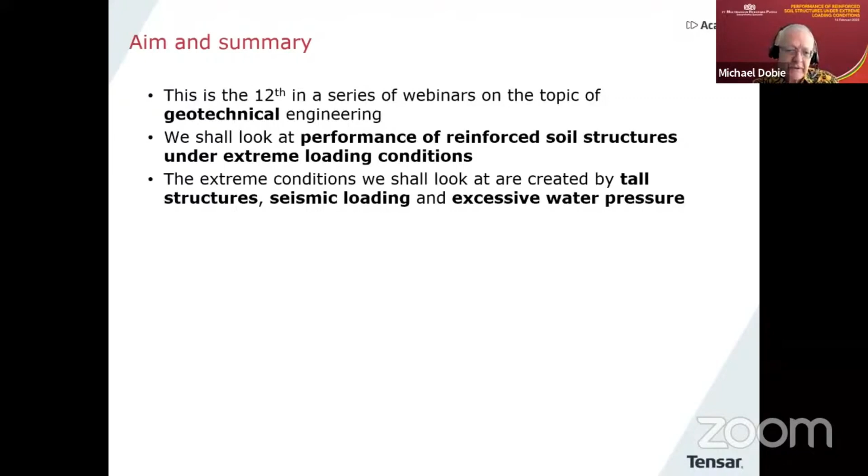In fact, the extreme conditions that I want to look at principally involve tall structures, which obviously create high stresses. Then we have seismic loading, which can be very extreme, and also, of course, water pressure, especially when the water pressures are quite high.

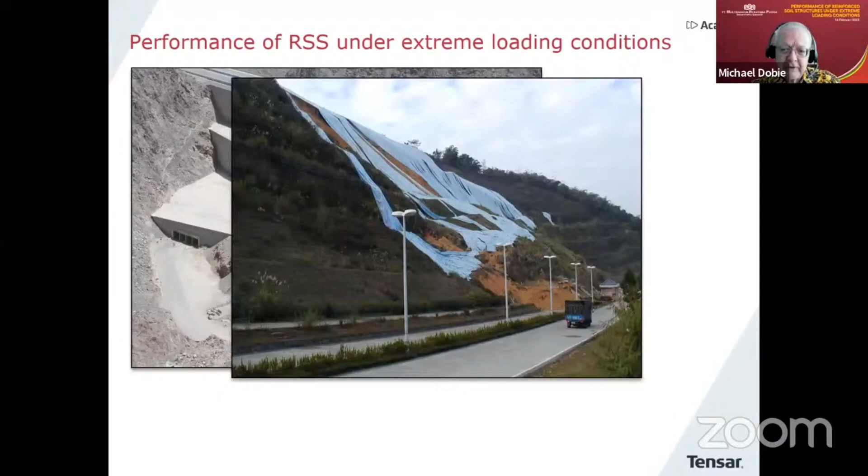So some images, tall structures. I said we'd talk about the effects of tall structures because they create such high stresses. The effect of earthquakes, which unfortunately can cause failures like this, and the effect of extreme water pressure and water conditions. That's the aim today.

And what I would like to do is to look, in fact, at a variety of situations. We'll look at 3 tall structures. In 2 cases, there'll be earthquake loading, and in 3 cases, there'll be water pressure involved. And of course, there will be some combinations of the 2.

And really, my main aim in doing this today is to look at this question: could routine design and stability analysis have predicted what was later observed? This is very important, really, because we rely on these techniques in our designs, especially in routine design, but we would like to have some idea if it would predict some of these sorts of conditions and events which took place.

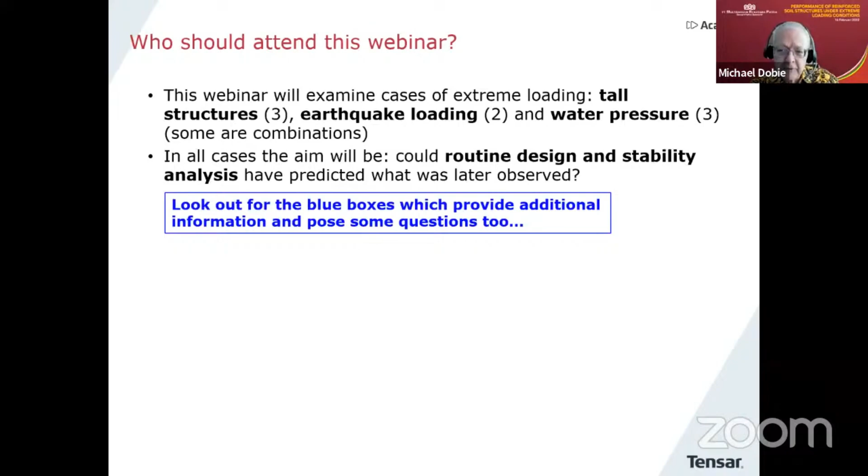As usual, I have these little blue boxes which will come up from time to time with some special or additional information. This is aimed at civil engineers who are involved in reinforced soil structures, and hopefully might be of interest also to more experienced geotechnical engineers and geosynthetics specialists.

So I'm going to look at 5 cases, cases 1, 2, 3, 4, and 5. And this first one is to do with water pressure.

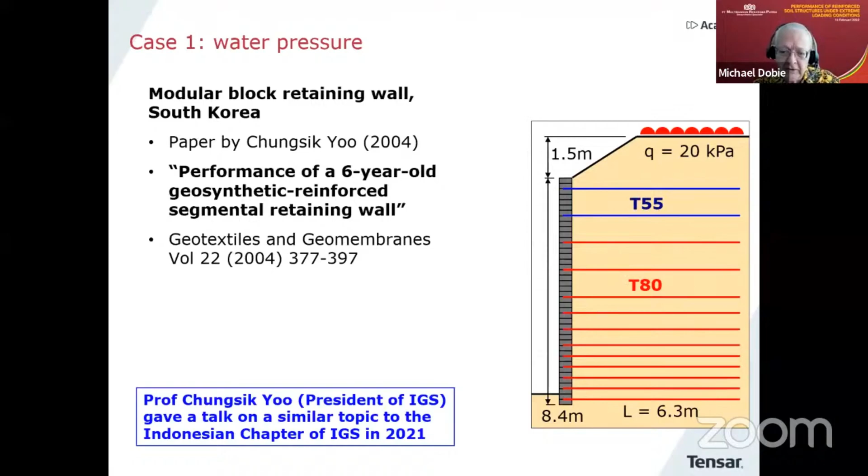It was a wall built some time ago in Korea, and there is a published paper about it by Professor Chungsik Yoo, and you can see the details there of the publication. Of course, Professor Yoo is also the president of IGS, and he talked to us last year in an Indonesian chapter event of IGS on a similar topic, but not this particular wall.

So a few details. This was a chemical plant in Korea, a modular block wall. You can see the range of the heights there. And what was rather important, it was supporting both an access road and utilities. It was built in 1994-95.

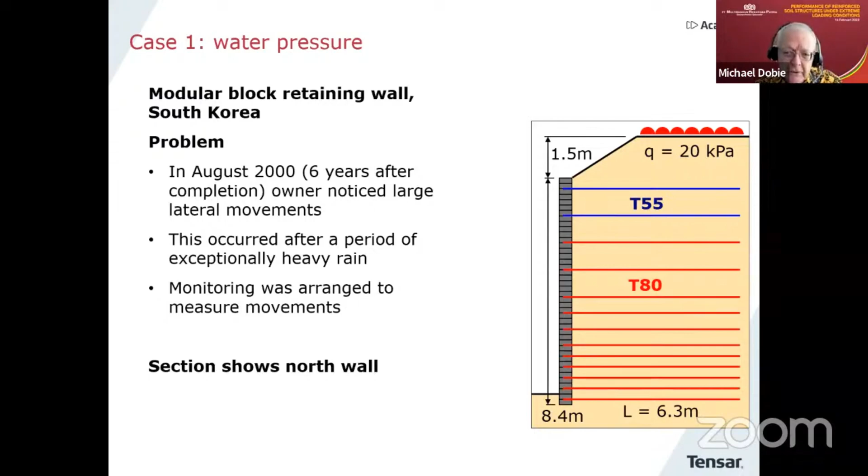And then what about the problem? Well, in August 2000, which was 6 years after completion, the owner noticed that there were lateral movements going on in the wall. And I think, as usual, this was occurring after a period of very heavy rainfall. So the client was very sensible and organized some monitoring to look at the deformations which were taking place.

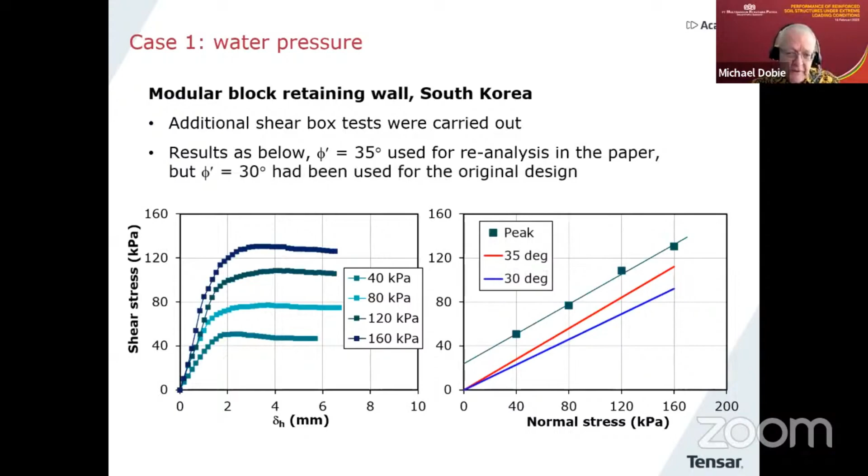So what I'm going to do then is to carry out some investigations using a design method based on 2-part wedge. And it's also a method set up following the principles of AASHTO LRFD. And in the results we see, the results are given in terms of what's called CDR, or capacity demand ratio. And of course, we want to see values that are 1 or greater.

But you'll see in the internal calculations, if particular wedges have a CDR less than that, a post-construction strain calculation to look at serviceability, also based on the same 2-part wedge approach. So here's an image from a computer program which carries out these calculations for you.

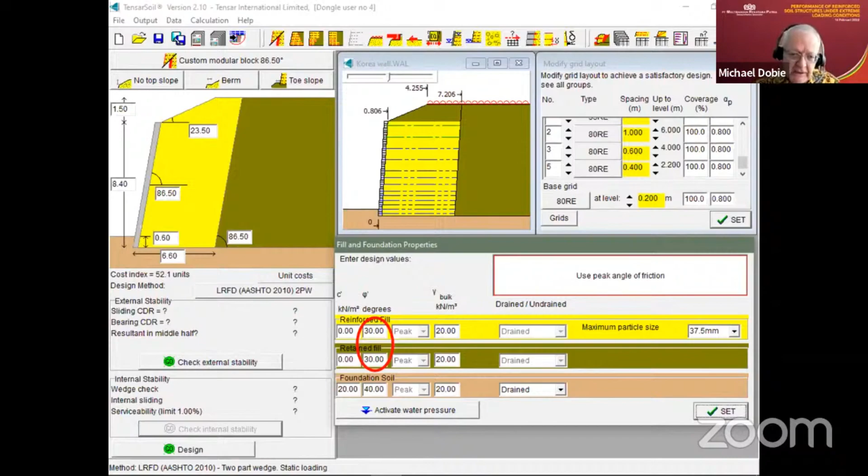I think it's fairly clear what's going on there. You have the section in the middle at the top. And in this particular input, we're inputting the properties of the fills, and you can see there a phi of 30 degrees. So I put phi of 30 there in large characters, so that reminds us what's going on.

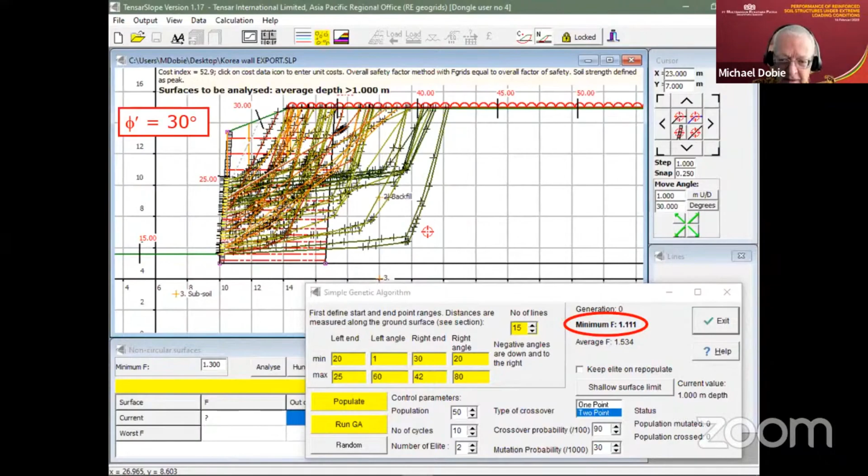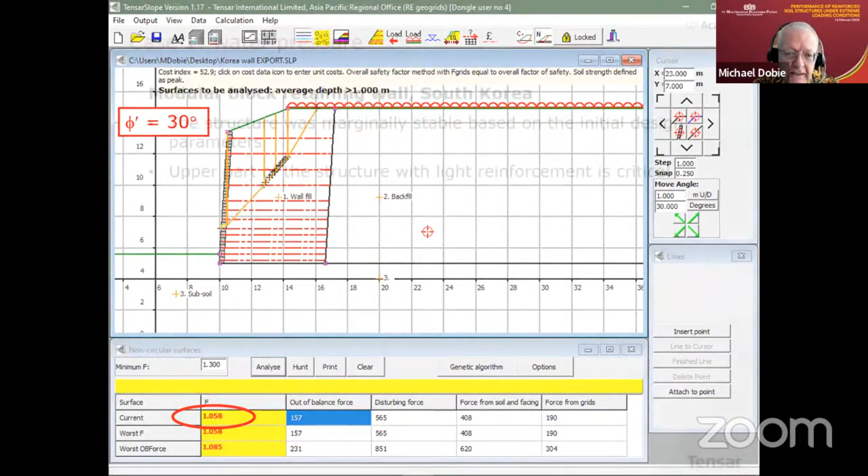And currently we have a safety factor there, you can see it there, of just over 1. And as we run the analysis and the technique finds the critical surface, in fact, we find there we have a factor of safety slightly over 1. So you can see that this was a marginally safe structure based on the original assumptions. And also it seems that it is the upper part of the structure which is likely to be most critical. That's where the critical surfaces were.

But what we'll do now is to switch over to a phi of 35 degrees, which was used in the back analysis, but also look at the effects of water pressure by defining an RU value, which is one way to do that, and see what happens. So there is the structure again, and we're now going to switch over to a phi of 35 degrees.

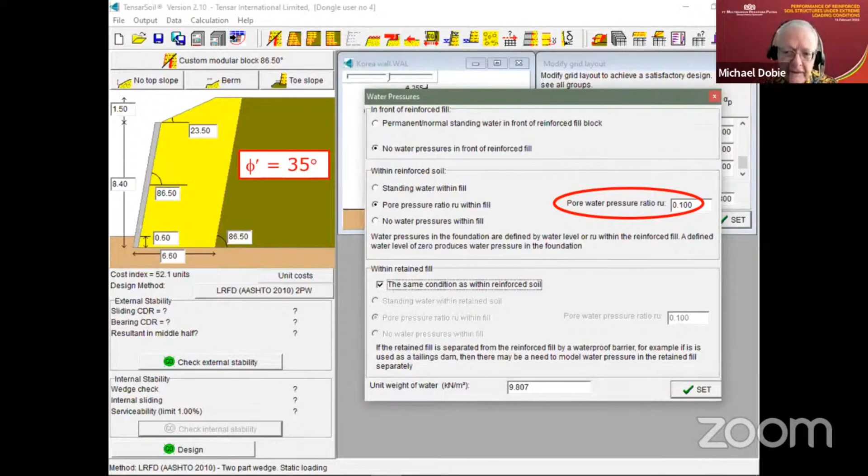But the issue comes if we add some water pressure. This is inputting water pressure. I'm going to do it using an RU value of 0.1 - you can see it inside the red shape. So to remind us, we're now looking at an RU of 0.1, and we start to get quite a few red wedges, which show an unsatisfactory performance.

If I increase RU to 0.2, it becomes even worse - clearly not satisfactory. And when I look at the post-construction strain prediction, we're back to that rather high value, somewhere over 1.5% for most of the layers of geogrid. So we can see that once you add water pressure to the design with the higher phi value, we also see an unsatisfactory performance.

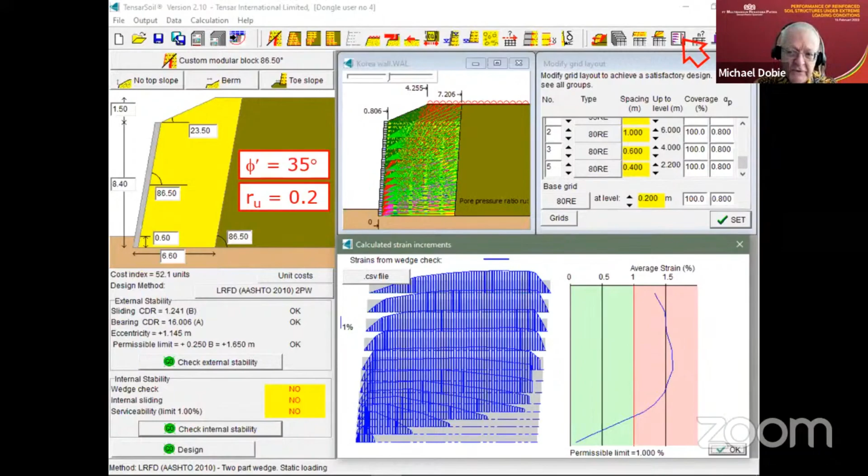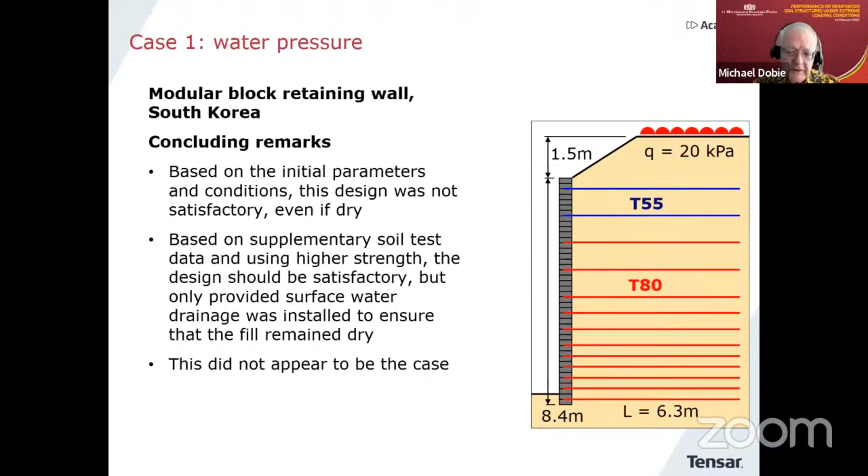So a few concluding remarks on this investigation: based on the initial parameters and conditions, the design was not satisfactory, even if it was dry. But when we take into account the higher soil strength, the design looks okay until we add some effective water pressure, which I did using RU, but of course you can do that in more sophisticated ways. So I think the performance that we see in this structure is really not surprising based on the analysis we're looking at here.

Early in construction, there was an issue noticed that there was some outward deformation of the reinforced soil wall. So they installed some instrumentation to measure the outward movement, which was done by simple survey targets.

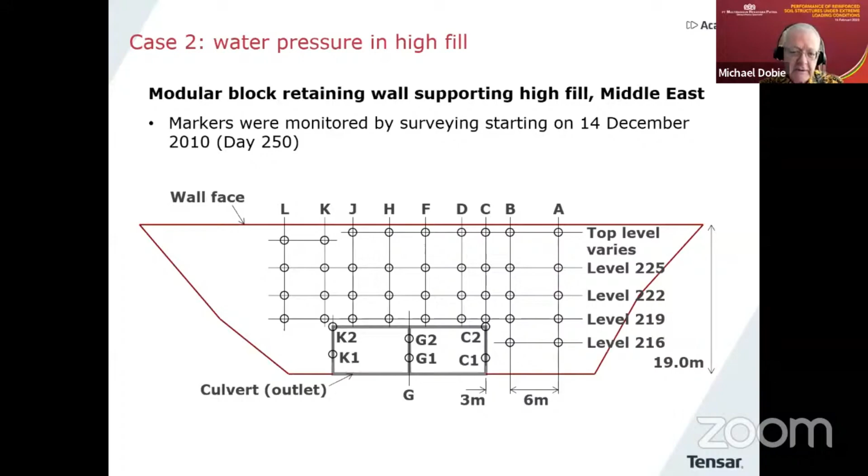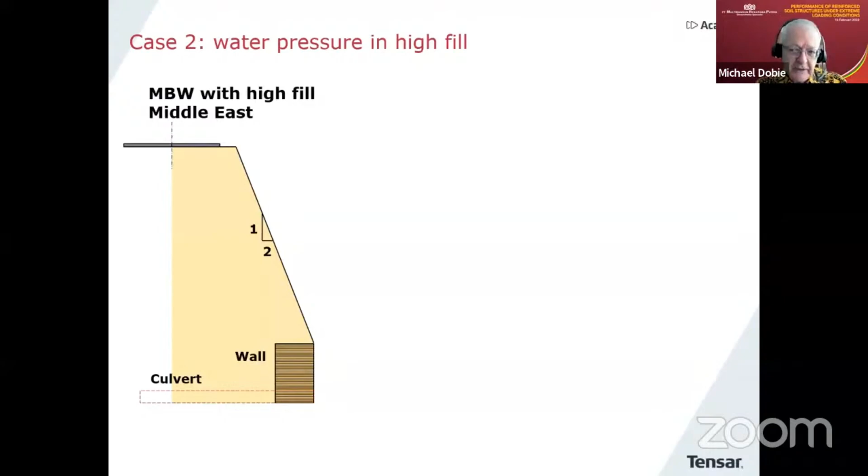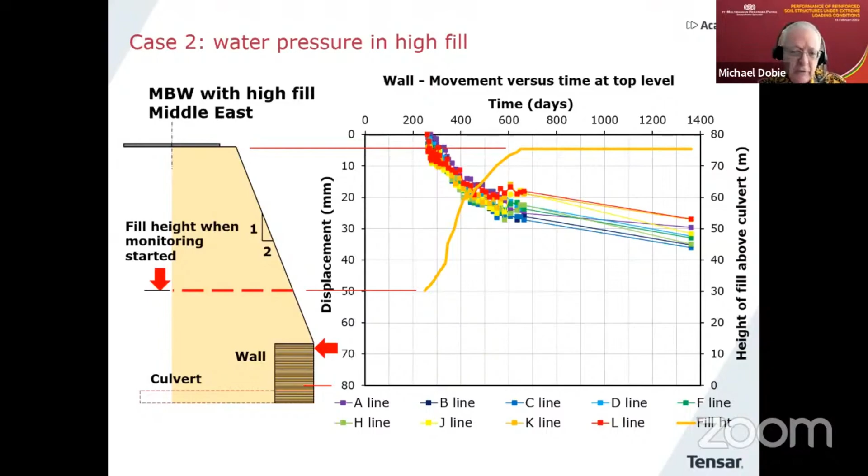But that isn't the main point. What was really interesting when they set up the instrumentation was that the culverts were built in 10-meter sections with joints. So the contractor decided to actually measure the expansion of the joints to give some indication of movements within the base of the fill, which is a very smart idea and a very inexpensive way of doing some monitoring. So we'll have a close-up.

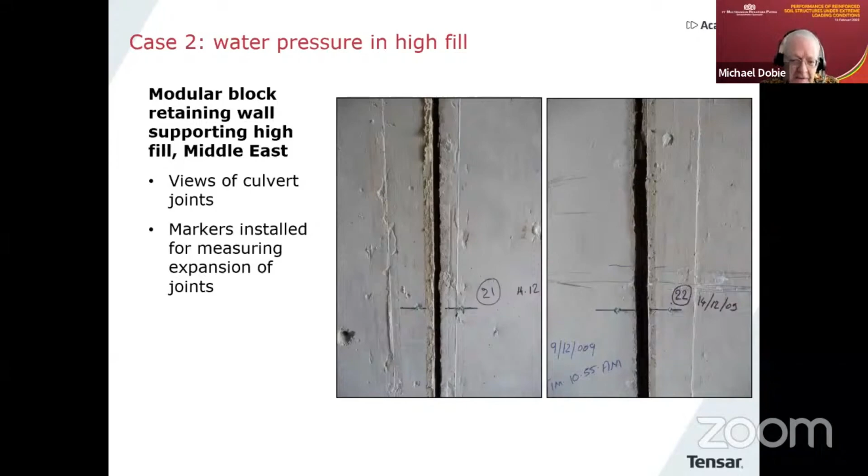There are a couple of joints inside the culvert, and you can see how they have both opened up. The black is the gap between the culvert sections, which is developing, and they put measurement points either side and take measurements. Of course, these measurements are very accurate and resolved down to a small part of a millimeter.

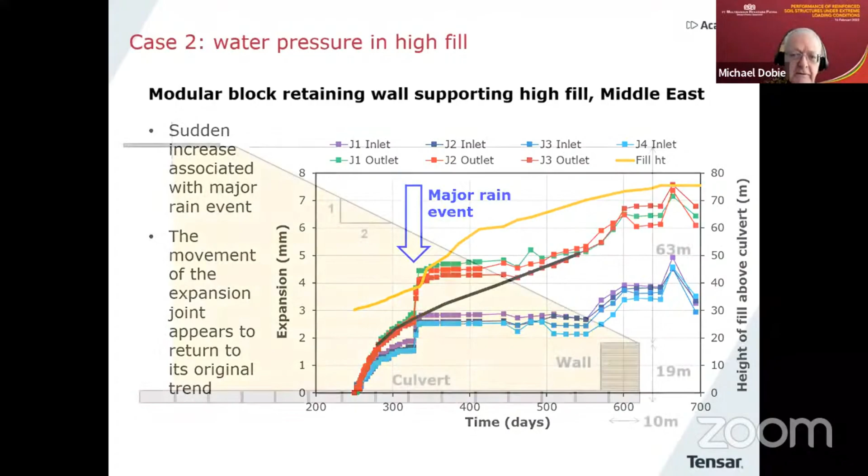So if we now go back to our cross section, we need to be aware that in this particular structure, the general fill was an open graded rock fill because it was coming out of mountains. It was large rock sizes with big pore spaces between them, so an extremely high permeability. But the specification of the reinforced soil block itself was also a granular fill, but a well-graded granular fill, so it was of relatively low permeability.

And this is a detail which is really important to think about. At the time of that sudden increase in movement, the fill had reached the level given by the red dotted line. So if you can imagine the fill's reached that point, we have a very open graded fill over most of this huge area, and it rains very heavily. The rain therefore gets into the open graded rock fill and puts a large amount of water pressure on the back of the reinforced soil structure. That would be the interpretation and the reason for the sudden increase in deformation, or the rate of deformation, in the culvert joints.

So it's an intriguing behavior, and it's not quite the end of the story. So there is the structure again. As I said, the issue here was that we had a relatively low permeability reinforced soil structure with a very high permeability backfill, so that means the reinforced soil structure acts like a dam in a way.

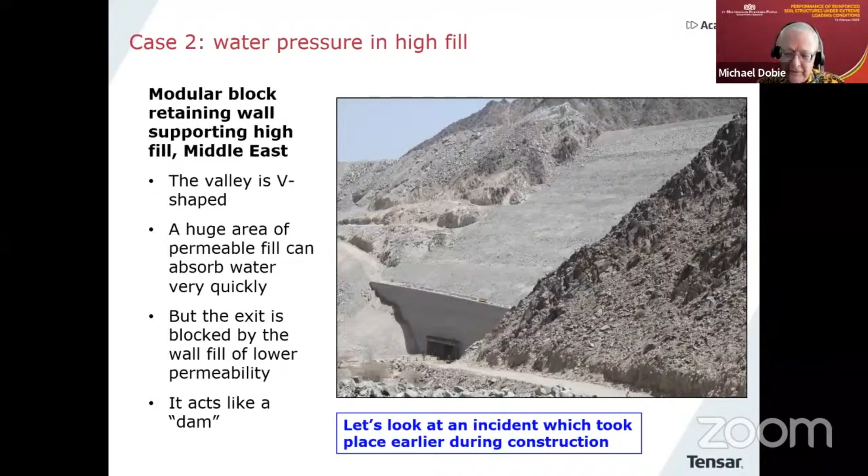But there is actually another incident that took place much earlier during construction, which is quite fascinating. The next slide will show you a video. It's quite loud, so be ready for it. So let's have a look and see what happened. This is sometime earlier on during the construction.

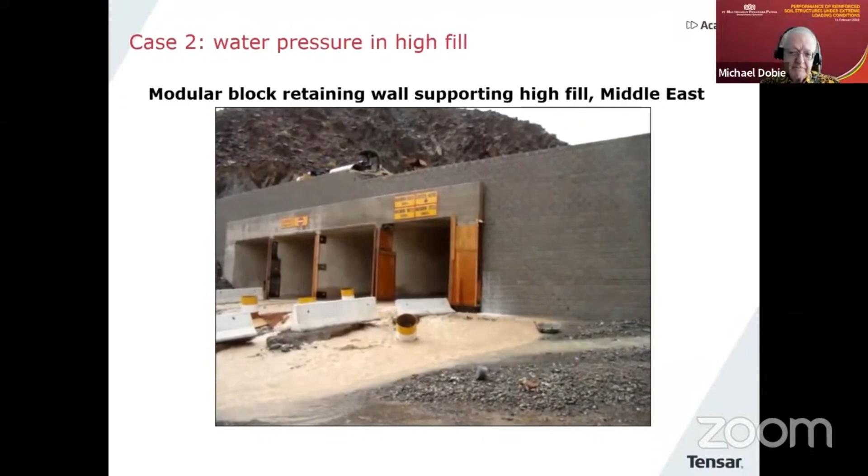I think you'll agree, a quite extraordinary video. Following that experience, there was a very nice statement from the contractor's project manager. I won't read the whole thing out, but essentially the really excellent behavior helped him sleep at night, because

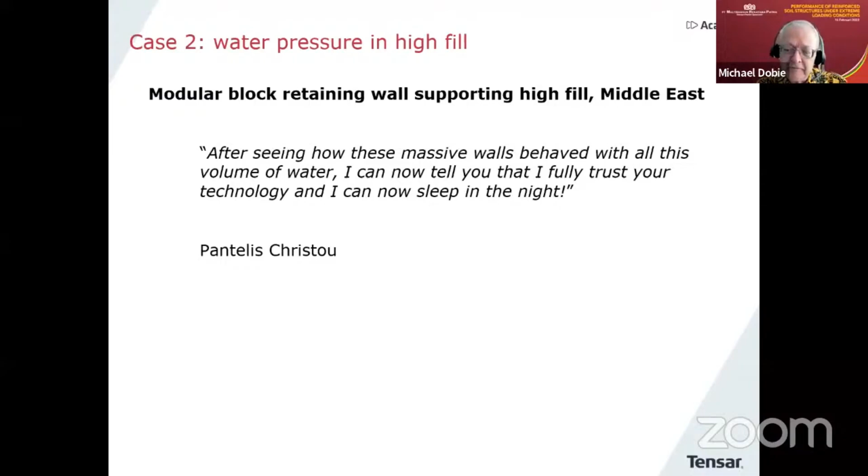you could see how well these structures could perform under such an extreme loading situation. But what was actually going on there? We saw that water pouring off the top over on the right-hand side. I wasn't there at the time, so I can't be absolutely sure of this, but my assumption is like this.

Let's go back to the full cross-section of this particular structure. At the time of that particular rainfall event, there was no monitoring yet. They hadn't had the problem with the culvert exit, so they weren't monitoring anything at this stage. But the fill height had reached something like that. In that picture just now, the wall was about 7 meters high. It wasn't completed. So you have that same situation of the very porous rock fill, the light yellow color, and the low permeability fill of the reinforced soil mass.

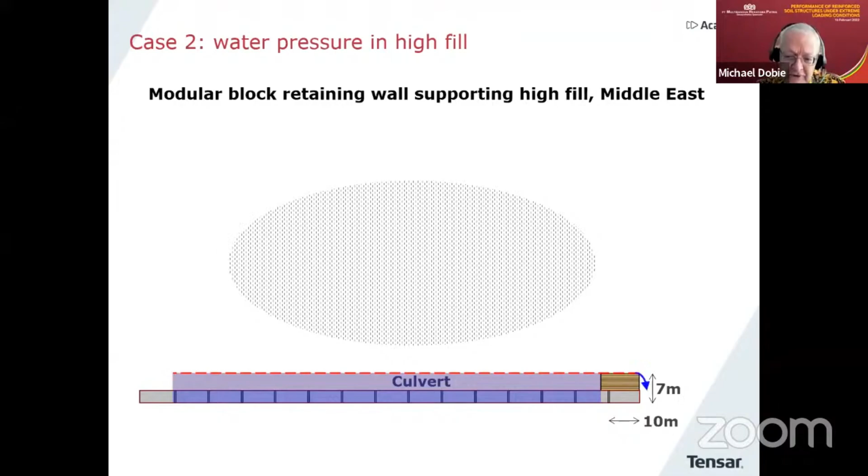So it rains, that's meant to indicate heavy rain, and it would be my assumption that this fill was so porous it could fill up with water, because the water's coming down the valley sides from all over the place, and it's concentrating in the bottom of the valley, and essentially it fills it up. That's the only way I can find an explanation as to how the water, with that little blue arrow there, was running off the top, as we saw just now. So this is certainly an extreme event.

It's interesting to spend a minute or two looking at the stability of that part of the retaining wall, because it stood up beautifully. There was no problem with it, despite the fact it may have been supporting a full height of water pressure behind the backfill, or behind the reinforced fill. So let's just have a look at a couple of calculations to see if that makes sense.

I put this case into a reinforced soil retaining wall design program. It's the same two-part wedge one, but I'm not interested in internal stability, that's no problem. I'm interested really in sliding. If we look at this particular analysis at the moment, the sliding CDR is over 8, in other words, it's enormously high. Not surprising, you have a very wide reinforced soil block, very good conditions. At the moment, we're assuming all the water pressures are 0.

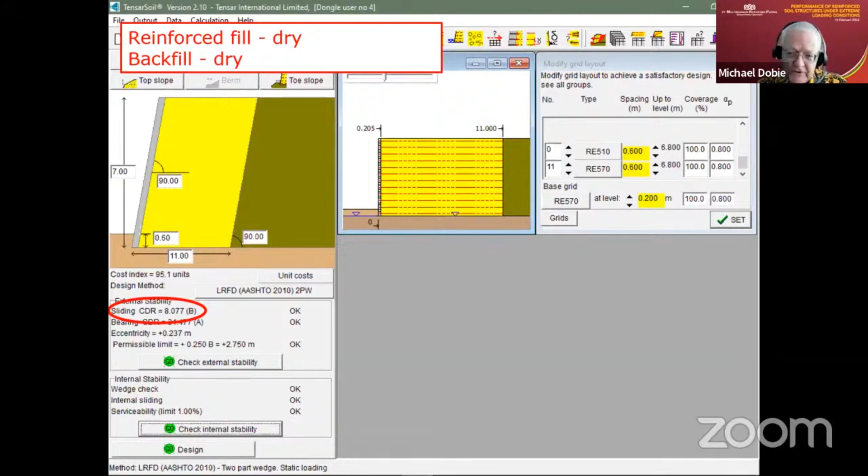Okay, so now let's try to imitate what we saw. What I'm going to do now in the input of the water pressure is put a 0 water level within the reinforced fill and a full almost 7-meter height within the backfill. If I do that, I now get a section that looks like this. And if you look very closely, you can see up there the water level line at the top of the backfill, but within the fill it's at the bottom.

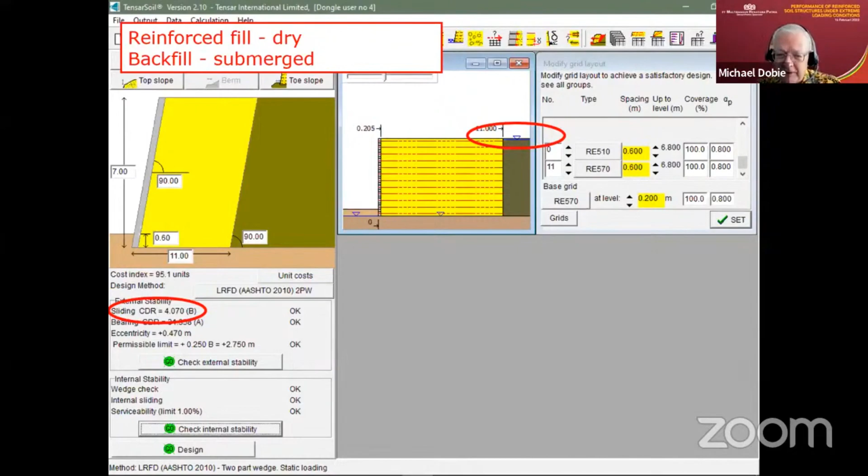Okay, so if I now look at my calculation results, the CDR is half, it's now around about 4, it used to be 8. So the effect of that water pressure has halved the resistance to sliding. It's still very high, of course. And if I look at the actual forces, we now have this huge force from the water pressure. In fact, the total force now is almost 300 kilonewtons per meter, it used to be just over 100. So the effect of this water has been to cause an enormous increase in the force on the back of the reinforced fill.

If you want to look at an even more extreme condition and assume there was some water pressure buildup within the reinforced fill, which probably didn't happen, but maybe it was possible, then of course we get a slightly lower CDR value on sliding there. It's now just over 3. And of course in here, the forces from the backfill are the same, but we now have an uplift force coming from that water pressure, which is the reason for the further drop in the sliding resistance.

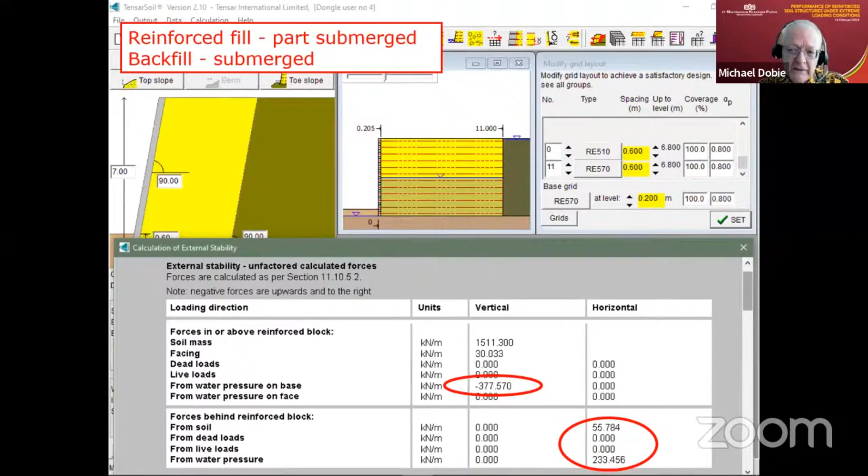So the structure performed perfectly okay, of course, but it is interesting that the analysis does show us quite nicely, and that could well explain, from the information we saw with the culvert expansion, or the culvert joints expanding, from that monitoring that came later on, a very good explanation of why we had a sudden increase in the rate of the outward deformation.

Anyhow, all was well. The rock fill could be easily drained. But there's a very good lesson that comes out of this: take extra special care when designing structures with fills of varying permeability. Even if they're all granular fills, look at the relative permeabilities to make sure you're not creating a situation where you can dam up the water.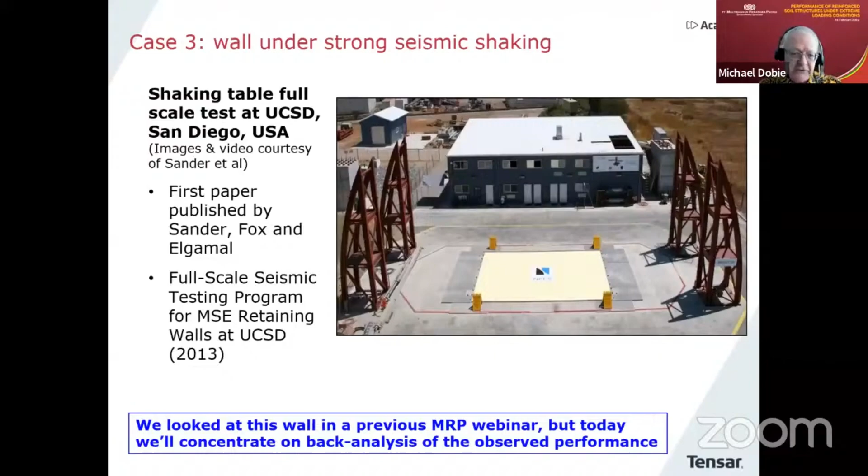Case 3 is one I've shown before in a previous MRP webinar, which is actually a shaking table test. We're now interested in looking at a wall under strong seismic shaking. Because I presented this before, I'll be reasonably quick about the outline. What we're looking at is a shaking table with a full scale wall built on it. There are some published papers about this from a few years ago.

There is the container which holds the retaining wall, and there is the view of it. The wall is 6.1 meters high, a full scale wall, with a sand backfill and modular block facing. The total weight of the model is over 800 tons. The design was actually carried out for a horizontal acceleration of 0.7 G.

In reality, when they tested this wall, they shook it with a total of 41 different excitations of the shaking table, which included 3 real earthquake records. The strongest that was reached was 0.55 G, which was actually a model version of the Kobe earthquake.

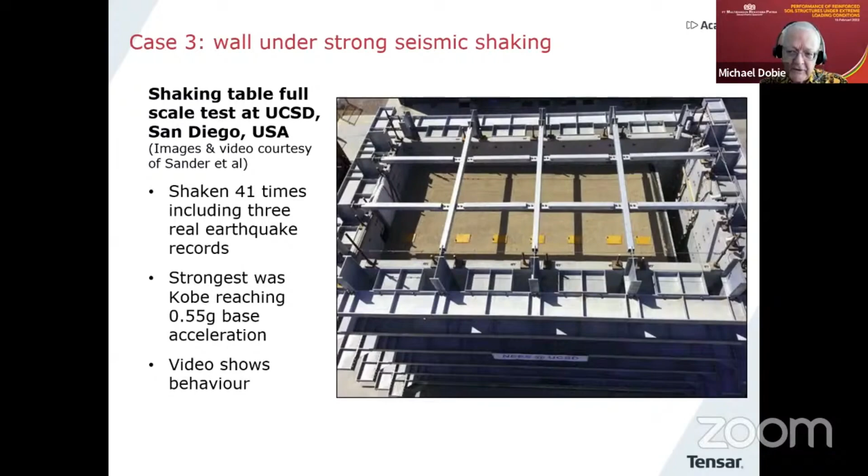The coming video, which again I've shown before but is always worth having a look at, shows the actual behavior of this wall during one of these shaking events. There's lots to look at - you'll see a view on top, some movements of the wall, and the accelerations that were being created. It's a slightly noisy video, so off we go.

Before I get there, here is the cross section of the wall. We'll come back to that in a second.

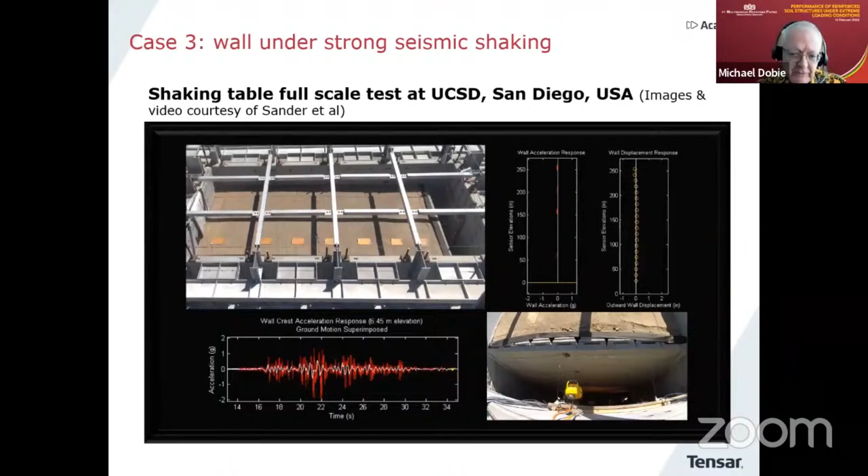Lower left is the acceleration record, and up top right is the backwards and forwards movement of the wall. The video pictures are fairly obvious what you're looking at. If you look at the scale, the actual accelerations went well over 1G for brief instances. It really is the most incredible record of the behavior of a structure like this during a strong earthquake.

Just to show you in more detail, the inward and outward movement: there is the cross section of the wall, and the graph shows the backwards and forwards deformation. From the initial position, the furthest outward movement looked like that, and the furthest inward movement looked like that. After all the shaking had finished, it ended up back almost where it started. It really was the most excellent performance of such a structure.

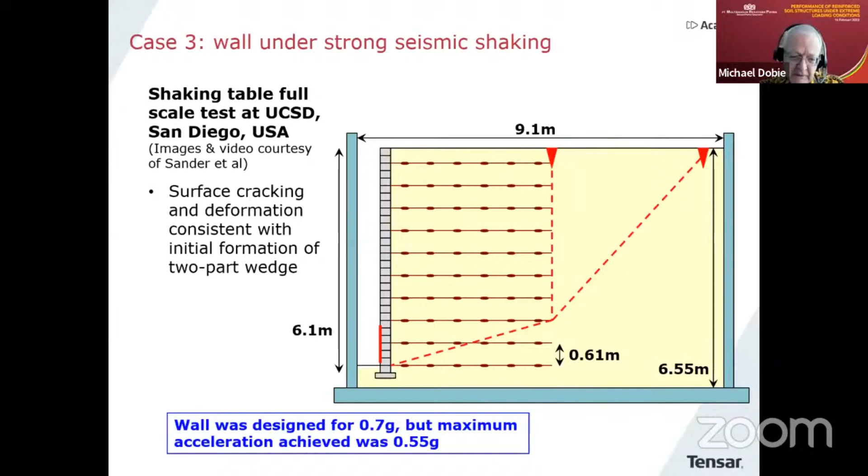After the completion of all the shaking, they noticed some cracks in the backfill, and the whole system of deformation looked very much like the formation of a two-part wedge system or mechanism. So that's what I want to do - examine this behavior using a two-part wedge method. Just to remind you, the wall was designed for 0.7 G, but the maximum acceleration achieved was actually 0.55. Let's have a look at that.

We're back in the program now, which uses a two-part wedge method. The geometry of the wall has been put in there, and you can see it there. We're now looking at the acceleration of 0.55 G, and the phi constant volume for the fill had been established or measured at 38 degrees. With these conditions, we begin to see a few pink or red wedges appearing, and the critical plane would continue up through the backfill at about 45 degrees if you had the full mechanism.

If I look at the details of these wedges, I see some where the CDR has dropped just below 1, about 0.8. So under these conditions, the CDR is slightly below what you'd want, but this is using phi CV. Phi peak was 42 degrees. If I switch over to phi peak and look at the similar results, the lowest value of CDR was over 1.5. This probably explains quite nicely why the structure, although it did start to show some signs of cracking, performed very nicely under this level of shaking.

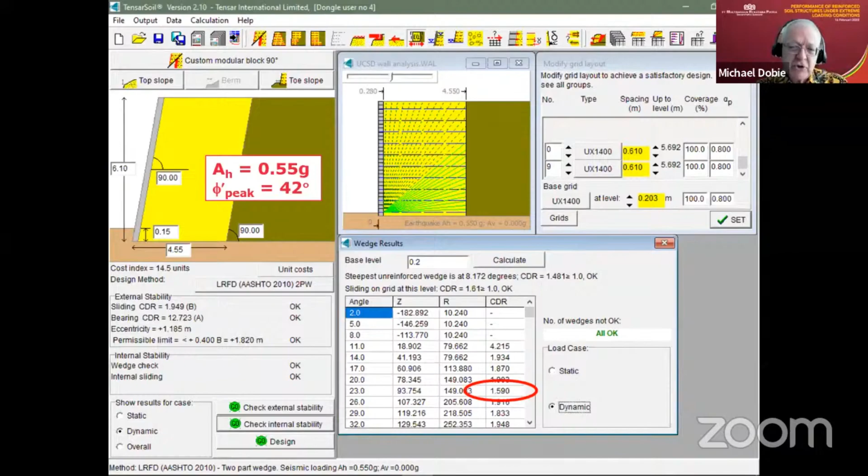And here it is being confirmed by a simple static analysis, which is really quite nice, because this is a very common technique for carrying out designs of this form of structure.

If I now look at 0.7G, which was the original design acceleration, even for phi peak of 42, I start to see one or two red wedges appearing. And if I go to 0.7G at phi CV, then the lowest values go all the way down to 0.45. So would it have survived 0.7G? Well, we don't know because it never reached it, but clearly it would have been a pretty severe shaking situation.

So that's just a summary. You can see that if we look at the actual maximum acceleration value, which was PGA of 0.55G, then the results are very good, and the critical wedge angles are very low, as you can see. That's phi critical, or sorry, the theta critical that you can see there in the brackets.

So this in my mind shows that these techniques can work very well in a situation for designing or predicting behavior of a retaining wall under strong seismic shaking.

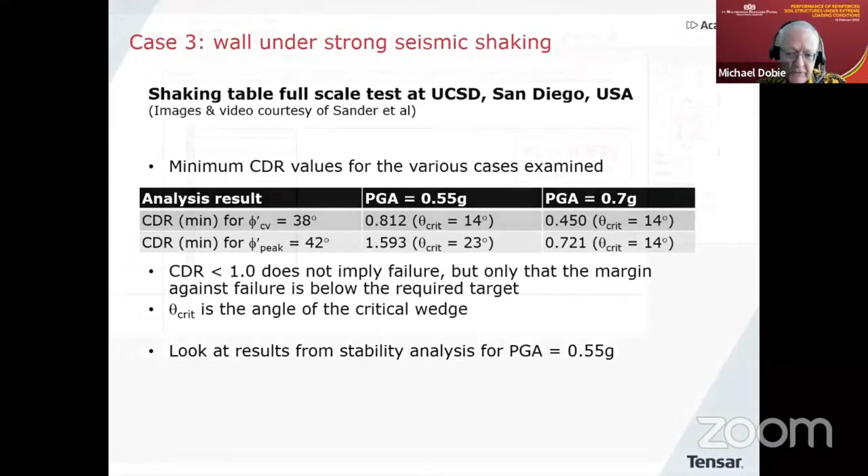It's also perhaps interesting to have a look at the effect of a stability analysis using a special technique, and we'll look at only the PGA of 0.55G. So there is the cross section, and we're going to use a special technique where we search for the critical case, as we did with the first wall, the Korean one. So there are a series of random surfaces, and then this algorithm runs until it finds the critical condition, which is a very low angle wedge like that, and the safety factor slightly below 1.

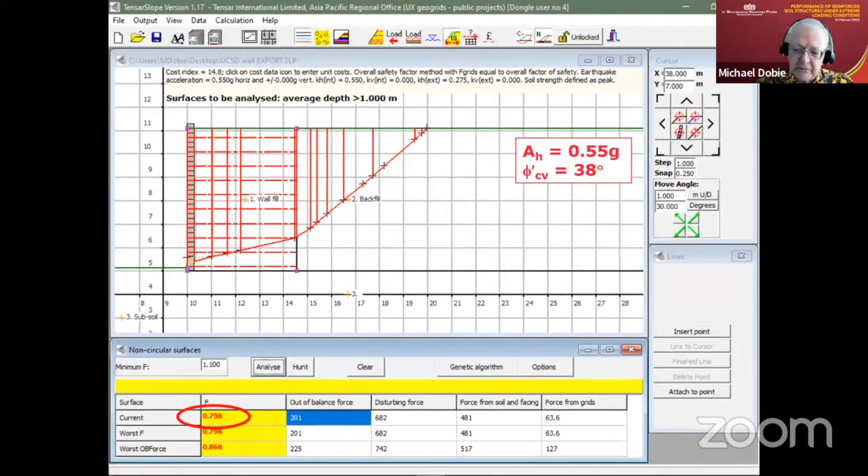And if I then switch to a phi CV of 38, then the safety factor is a little bit lower still. But again, it's showing, first of all, that the mechanism matches quite well with what was observed, and we're getting a result that would be satisfactory and as expected.

Now, case number 4. In this particular one, I want to look at a case that I presented at a previous MRP webinar. But I think it's worth looking at again because it fits into the topic today of being an extreme event, because it's a tall slope and it gets affected by seismic shaking.

It took place during the Chichi earthquake, and a number of papers have been published about this particular slope. It was at the Chinan University in central Taiwan, and in this particular paper, one of the authors, Professor Kuo-Hsin Yang, talked to us in an ENA IGS webinar last year as well. So another one of our speakers from last year who was also involved in investigating this particular case.

In that particular paper, there are three failures that took place within this structure. One during construction, another during the earthquake, which is the one we want to look at, and then another one associated with heavy rain. So we'll investigate the second case.

So there are the pictures. I've shown these before, so I'm going to be fairly quick because I want to make sure we have time to go over case 5 quite carefully.

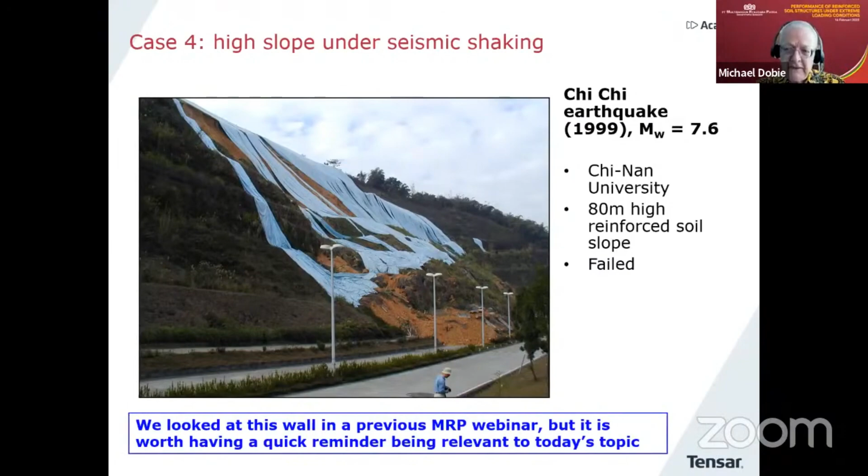During the Chi Chi earthquake in 1999, which was quite a strong earthquake, some of you might remember it, others may have read about it, but it caused a lot of damage, including to earth structures. This particular failure was of great interest to many people, and many people investigated and analyzed it. But I just want to repeat this case today because it is so relevant.

It's therefore interesting to analyze this with two targets. First of all, in the static case, it was standing up. So would you expect that? And then would you expect to see the performance that later on happened during the earthquake?

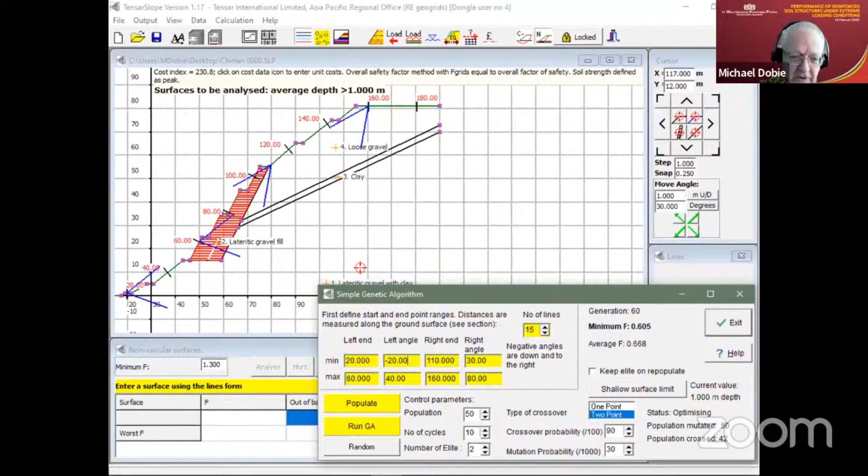So we'll carry out analysis using the non-circular technique, which I've shown to you before, where we create a family of possible non-circular surfaces, each one made of 15 lines within certain bounds. And having done that, we then use this genetic algorithm to very quickly fine-tune the search and find the critical case. This is the static situation.

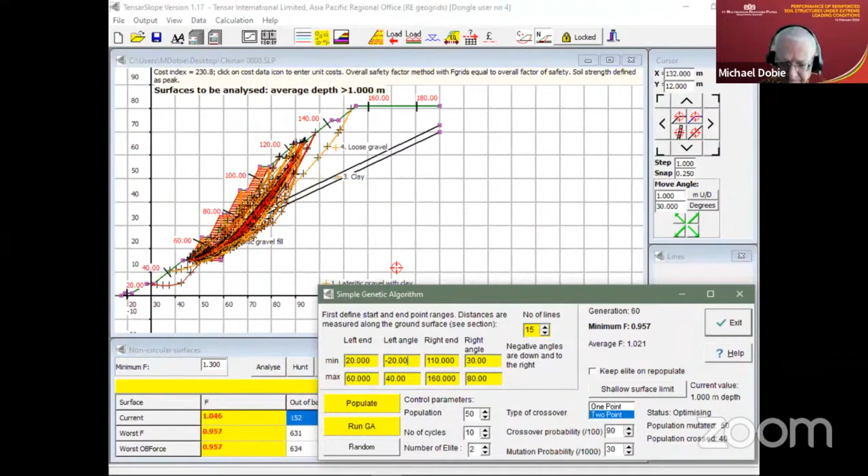In the static case, this safety factor comes out at something very close to 1. And the fact that the structure was standing up confirms that this was okay, it was stable, even though maybe the safety factor wasn't as high as it might have been. But you can see how the non-circular search has worked very well. You get a steep failure plane behind the reinforced soil structure, and then it turns and makes its way quickly through the reinforcement at the base of the slope. It's what you normally see in that style of analysis.

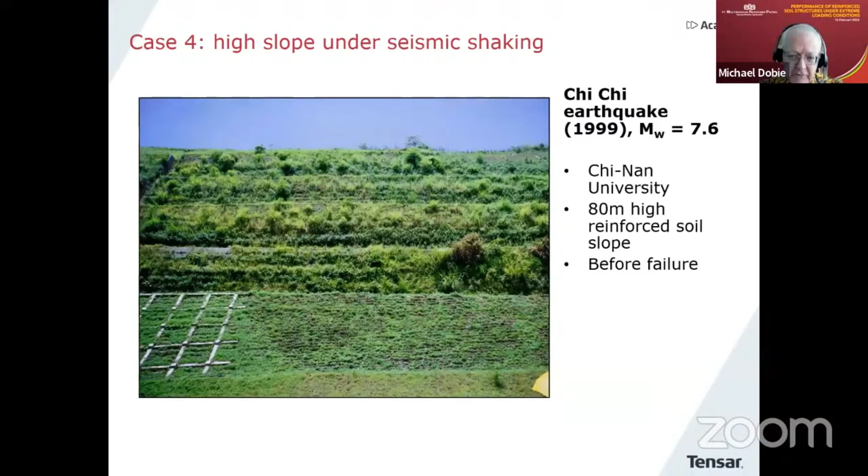So there's a safety factor. Okay, so now let us remind ourselves what's going to happen with the earthquake. There is a view up the slope before the failure, and there's a similar view at the base of the slope after the failure.

Now, one thing that is very clear from this is that the foundation failed. That lower slope where they had the ground beams and the anchors, that failed because the ground beams made their way across the road, were pushed across the road by the failing soil mass. So the form of the mechanism of failure is quite clear from that.

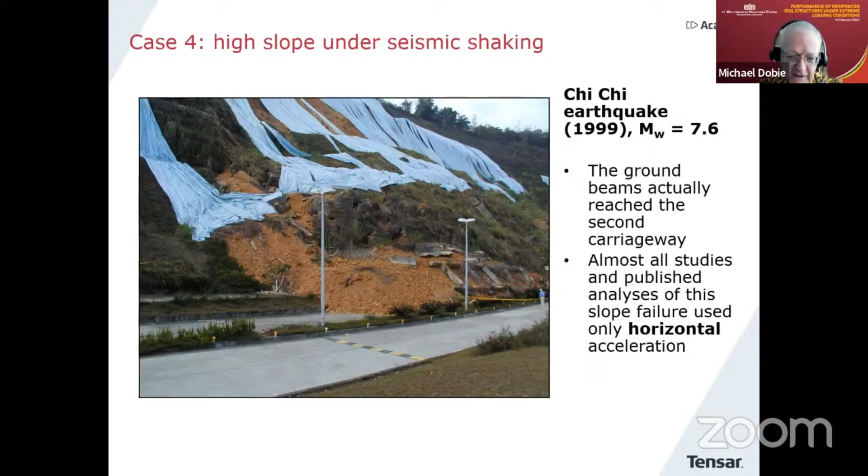There's a general view of it, and you get a good idea of the scale there because that's Dr. S.S. Lin standing in front of it there, who some of you may have heard of from Taiwan, having a careful look at the bottom of the failed soil mass. But you can see what's happened in that lower slope.

But that was applying a purely horizontal acceleration, as I mentioned just now. And one thing that was very clear from the records from the Chi Chi earthquake was that the vertical accelerations were also high. So this means you could have a moment in time with a very high vertical acceleration and maybe a smaller horizontal acceleration. So I'm going to change things over a bit and look at a case like this, where we have 0.1g horizontal and 0.3g vertical up and down.

And when I switch over like that and I run the same analysis, I find that I get a failure that is coming through the foundation. So what you're seeing there is really what happened. That was the place that it failed. That's where the ground beams were pushed off across the road.

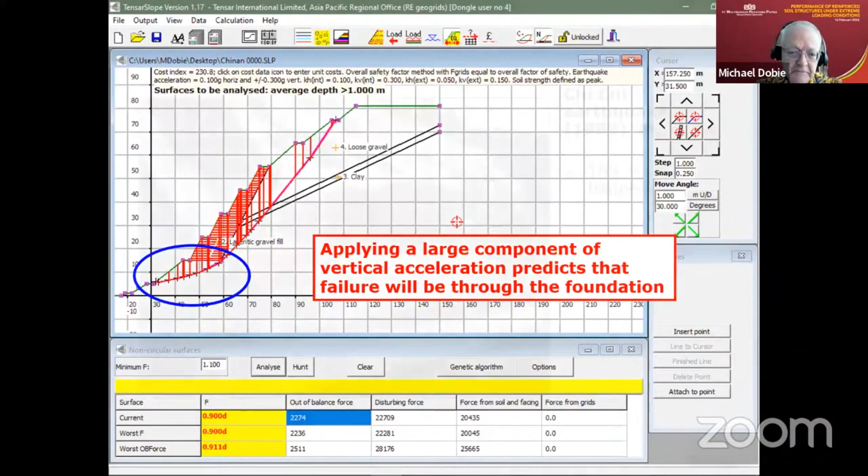And if you look at the numbers in the yellow down the bottom there, you'll see it says D after each one. D stands for down. So it is the downwards vertical acceleration which is giving the critical case. So what's happening here is that this large amount of extra downward inertia has obviously increased the forces for a very short length of time within the soil mass at the toe, and has created a failure, just like we see there. So that's what actually happened.

So I want to move on to case 5 now. This is to look at a high slope with possible water issues. The slope is actually the Yeager Airport extension in West Virginia in the USA.

This was a very large 45-degree reinforced fill slope, up to 74 meters high. It was built in 2005 to 2006 to extend a runway. It failed dramatically on the 12th of March,

2015. At that time, for those people who keep an eye on these things, there was an awful lot of information and opinion being published on various websites. There were many photos and reports and videos becoming available.

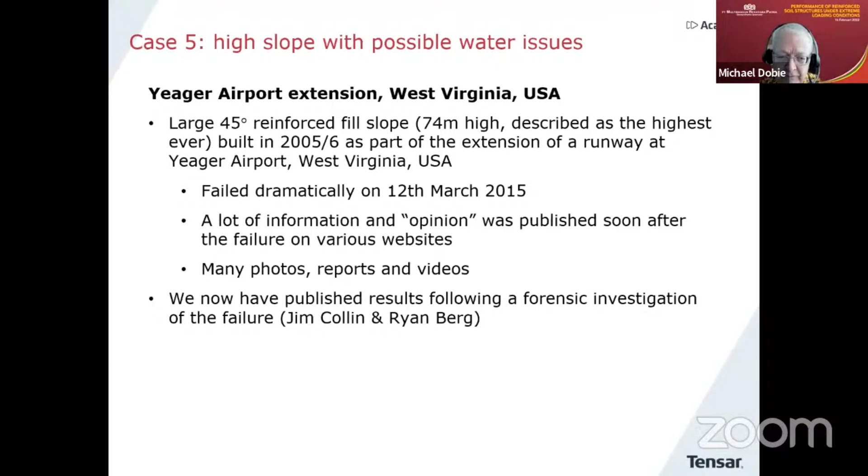The really good thing is now that we have a very thorough forensic investigation that was carried out by a team of people led by Jim Collin and Ryan Berg. Some of you might remember that, at an Indonesian chapter of IGS webinar last year, Jim and Ryan talked to us and presented the information about their investigation into the Yeager slope failure.

So for what actually happened, the place to go is to the papers and the material published by Jim and Ryan, because I think for anybody involved in structures of this nature, such big structures in quite difficult conditions, the lessons learned are really important.

Today, I don't want to talk about this. I want to approach this in a rather different way. In fact, the comments that follow are really my own personal observations based on information available before the failure took place. So going back to my original theme: would you expect the behavior that you see based on the initial analysis of the situation?

So that's what I want to spend a little bit of time looking at, because although this analysis has become superseded by the work carried out by Jim and Ryan, I think it's still got some interesting conclusions and features that come out of it. I thought it was worth spending a few minutes looking at this as the last of the 5 cases today. The pictures are well known by now.

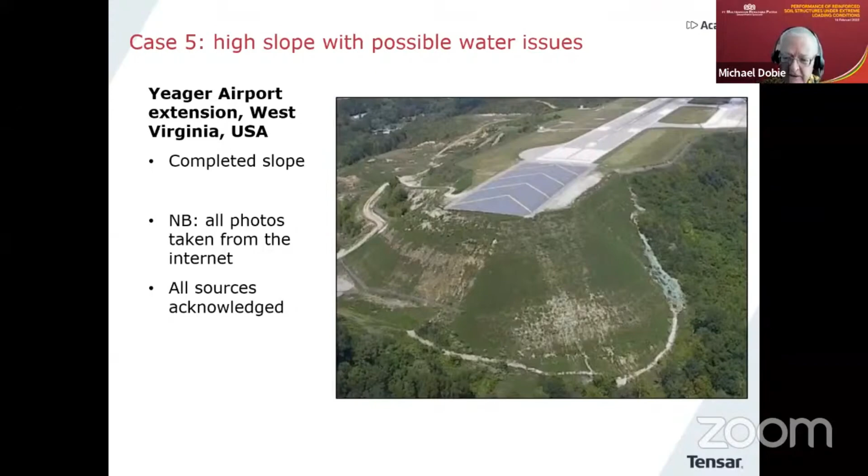before the failure took place. In other words, they've been published before the event. And also the same with the geometry. So the geometry which I've used in this analysis was as published. But again, I'm interested to know: could you anticipate what happened based on this information?

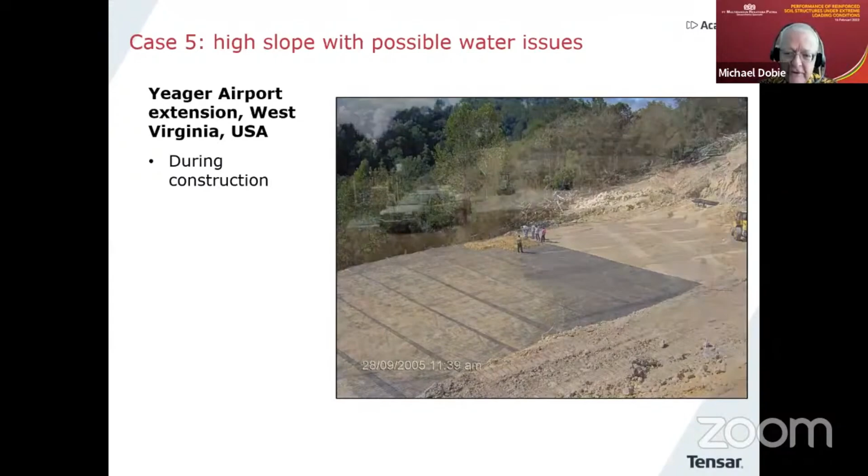And so I want to analyze this based on what we see at this stage of the project. A few construction pictures: there's the reinforcement being placed. The fill, you can see, get some idea what the fill was — it was rated to be a good fill.

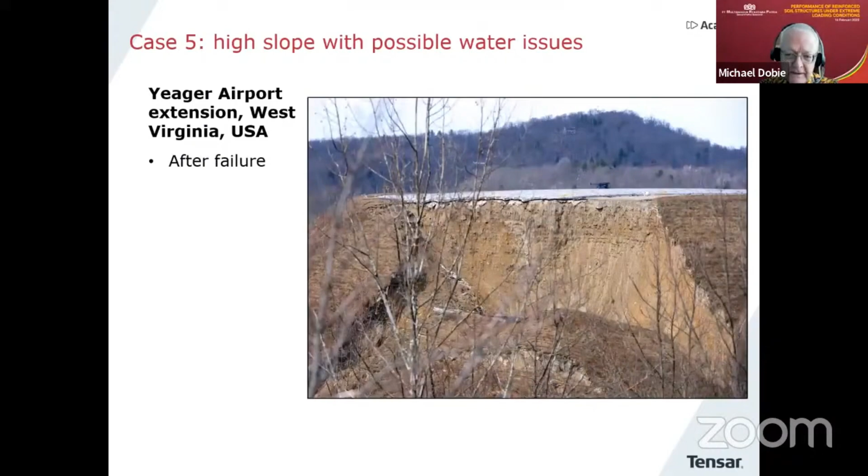So what was interesting about this failure is that it went right through certainly the upper part of the reinforced soil mass, which is quite an interesting observation. So just a few words about it.

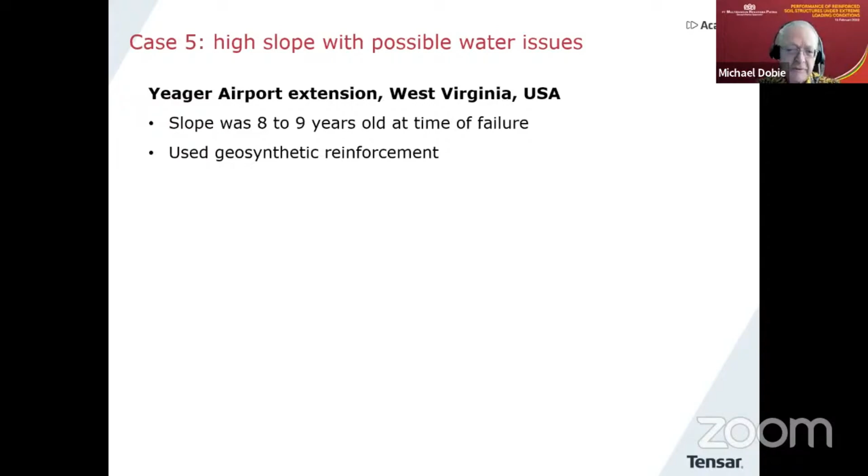At the time of failure, the slope was already 8 to 9 years old. So this is actually a delayed situation, a little bit like the first case, the Korean Wall — that one was a poor performance that took place 6 or so years after completion. So there's a kind of similarity there. The case study is mentioned in the FHWA manual NHI 10025, which covers principally the design of reinforced soil slopes.

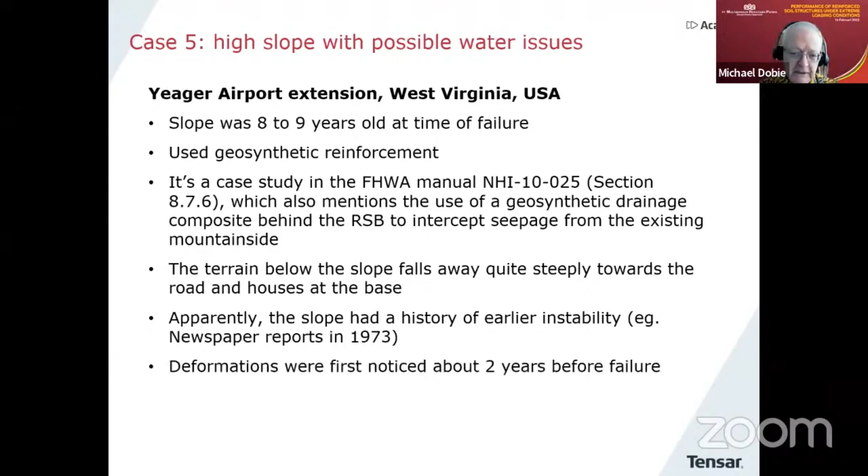The terrain below the slope falls away quite steeply, and there had apparently been an earlier history of instability, but that information is covered very well in the documents published by Jim and Ryan. Deformations had been noticed about 2 years before the failure took place.

To investigate this, I used the method of slices to analyze the slope using a circular surface, with a target safety factor of 1.3, as per the FHWA manual mentioned there.

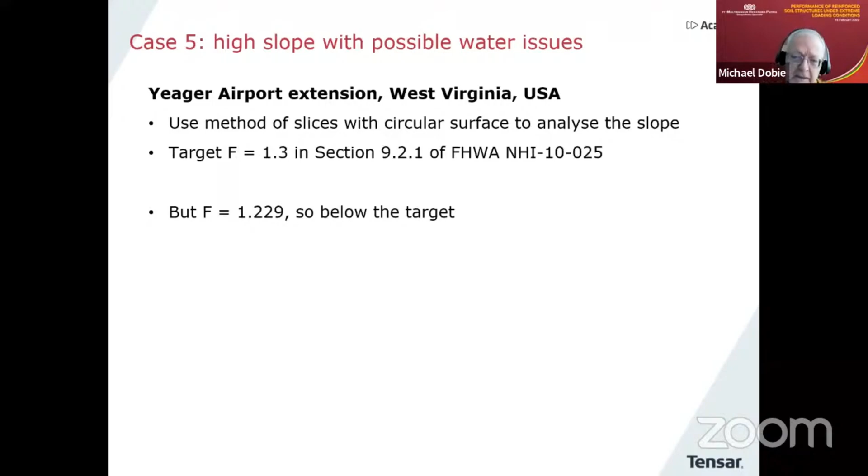So assuming the target was 1.3, that would be a little bit below the target. This got me thinking as to whether there is an explanation for that, if that is the case.

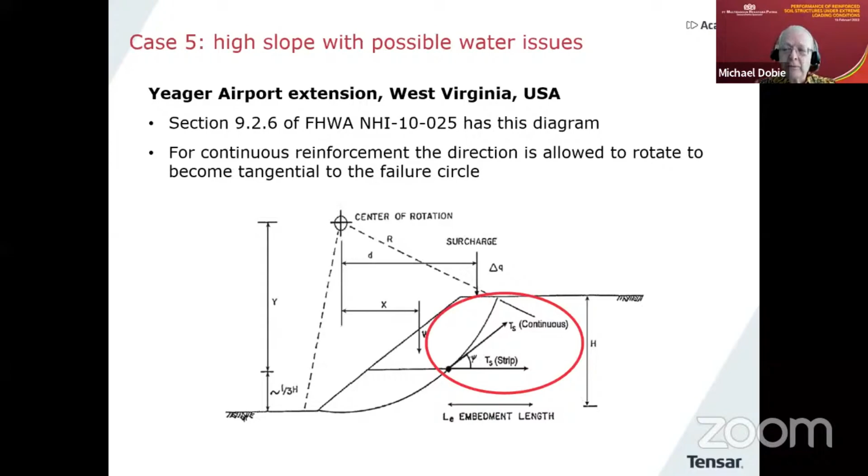The lever arm of that resistance changes from being the vertical distance from the center to being the full radius of the circle. So it becomes much bigger, depending on the location of the reinforcement. I thought it would be a good idea to understand the implications of that, because I believe this technique is used in some software or methods, but it's worth thinking about what's going on if you allow this to take place in analysis.

When you do that, you can calculate what I call a development length, which can feed into the mechanism. So if the geogrid is going to rotate, it has to slide out of the resistant backfill, or the moving part of the soil mass, and then make its way, or be stretched along the developing failure surface. We can calculate that particular length.

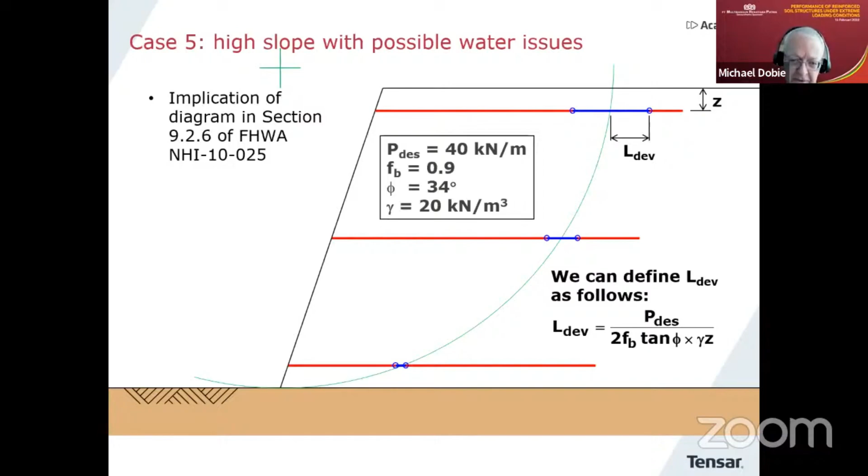I'm going to do it for a particular set of values - you can see a quite high strength reinforcement and some other properties - and the development length for different values of Z. I got a Z of 1 meter, a very shallow geogrid, all the way down to 75 meters, a huge slope. The development length changes from 1.6 meters at the top, a very long length that can be dragged out of the resistant soil mass, all the way down to just 22 millimeters at the bottom.

And this has an important implication. So what I'm going to do now is allow this surface to actually fail - we'll rotate it, start to rotate it. As we do this, you can see how I've allowed the geosynthetic reinforcement to become dragged along the failure surface.

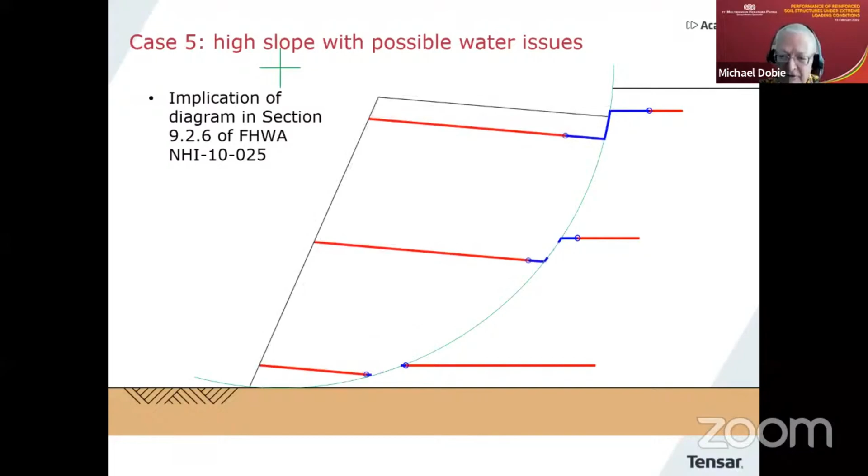Except for the lowest one, which I'm going to assume fails very quickly because it's got a very short development length. We allow it to go a bit further, and maybe the middle one fails, then carry on further, and maybe the top one never fails. The point about this diagram is that the reinforcement is rupturing by unzipping from the bottom upwards - the lowest geogrid fails first, then the others above it as the failure surface develops.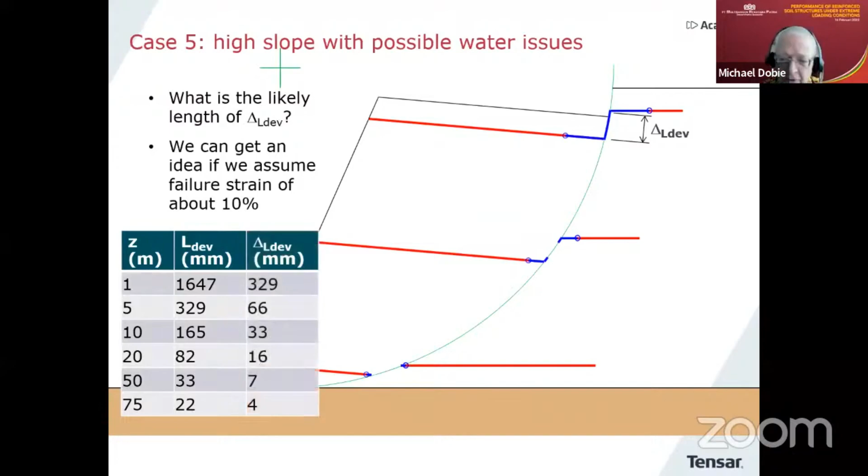So what is the length of the geosynthetic that may be stretched along the failure surface? You can approximately calculate that. If we assume the strain at failure is about 10%, then this delta L, as I call it, would be something like this: at 1 meter depth, over 300 millimeters that you could drag that piece of geosynthetic along the failure surface before it fails. But all the way down at 75 meters, it's only 4 millimeters. That's why that piece of geogrid would rupture almost immediately as the deformation started.

And of course, this whole concept raises another important question: what is the appropriate definition of soil strength to use if you're going to take into account rotation of the direction of the reinforcement? Do you use peak, constant volume, or residual? I think that's a difficult question.

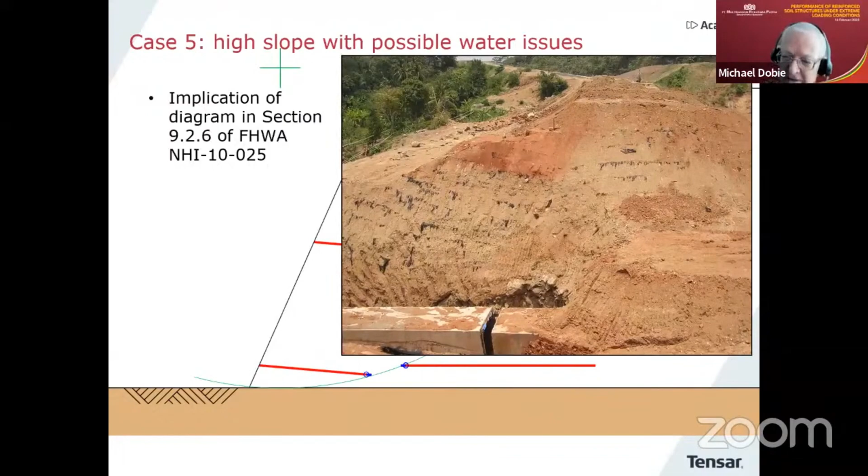Anyhow, is there any justification for what I've just said? Well, I'm looking at another failure here. This is a project in Indonesia, near Purwakarta, where a railway embankment failed, and I managed to go and have a look at it. You can see lots of little black lines and black material sticking out of the fill — that's the edge of the geosynthetic, actually a geotextile.

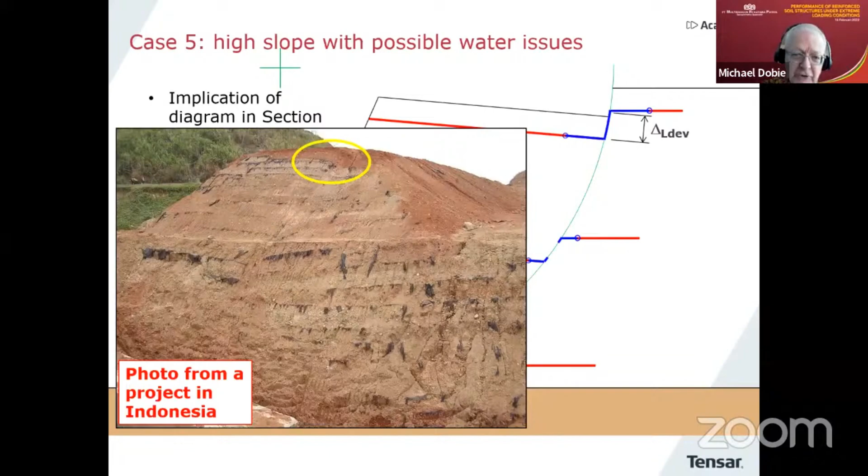This is very clear. But if I turn around and look at the other side of this failure, looking the other direction, and look up at the top, you can just about see it there. If I zoom in to that location right up at the top, what do I see? I see this geotextile has actually been pulled and kinked downwards, just like the blue line in my diagram on the top right.

So although my approach was very theoretical, this kind of behavior can actually be seen in a situation like this. So the whole point is, if you're going to take into account rotation of the geosynthetic reinforcement, it won't reach its peak strength at all points at the same time. It'll rupture down the bottom while it's still developing resistance at the top — which is one reason why I personally think it's an extremely unwise thing to do in analysis like this.

But let's go back to our analysis and let's permit this rotation to take place. Here is the same analysis — obviously it's circular, since this is only possible in circular analysis. Down towards the left at the bottom it says 'danger, rotational shear in use.' When I do the analysis, I find my safety factor is now 1.34. In fact, if you run the analysis a bit more, it drops down to about 1.33.

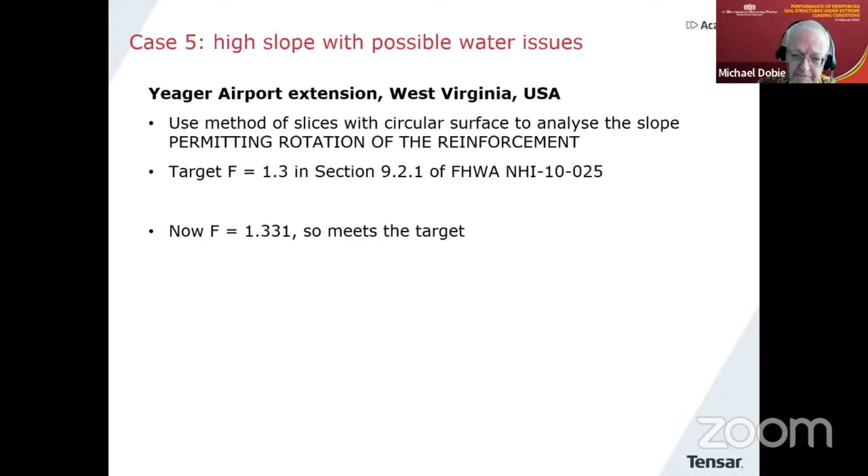But the important point is it's now over the target. So by allowing the rotation of the reinforcement to take place in the analysis, we can get a target safety factor of 1.3. But if you don't take this into account, the previous safety factor was about 1.22. So you can see you've lost about 30% of your margin against failure by taking into account this technique.

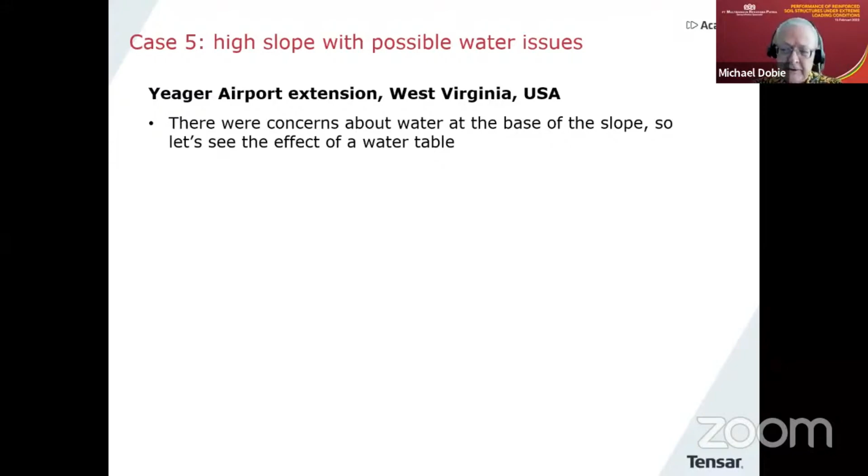But please be aware of the consequences. Now, there was water at the slope, at the base of the slope, so it might be interesting to see if this would have much effect on the analysis. I've taken the same arrangement and put a water table, as you can see by the blue line, and analyzed it, still allowing for rotation. The safety factor drops a bit — it's around 1.3 now, rather than 1.33.

And what's interesting is if I now go back to not permitting rotation, it's quite difficult to see, but there's a very faint yellow line within the reinforced soil mass. It goes back to the original failure surface, with a safety factor of 1.229.

So that was quite interesting. Also, let's have a look at using this simple genetic algorithm with the non-circular analysis, which I've said is the best way to do this.

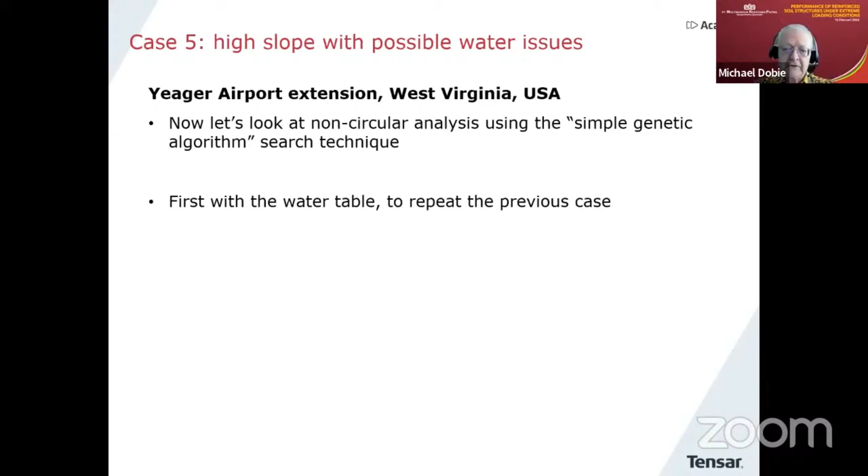So back to our arrangement, still with the water level, a water table in it. I run this search technique with non-circular surfaces like this, and you can quickly see how the critical surface is developing, and the safety factor in this case around about 1.2, dropping down to about 1.15 was the lowest. That's with the surface now restricted to the reinforced soil mass. So the non-circular technique does indicate a lower safety factor.

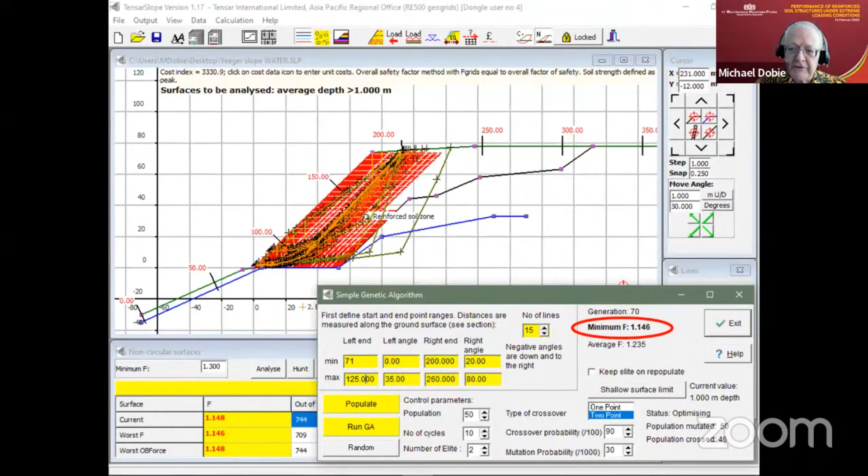Now this is using the Janbu simplified method, which by itself is normally slightly conservative, but I think the indications here are that the factor of safety of this slope was a little bit lower than the target. Also, rather interestingly, having the water level at that particular place, as I've drawn it, didn't have a very big effect. And in fact, that was one of the conclusions from the papers and publications from Jim Collin and Ryan Berg as a structure, and it had some significance, but not very great, which turns out to be the same as we see here.

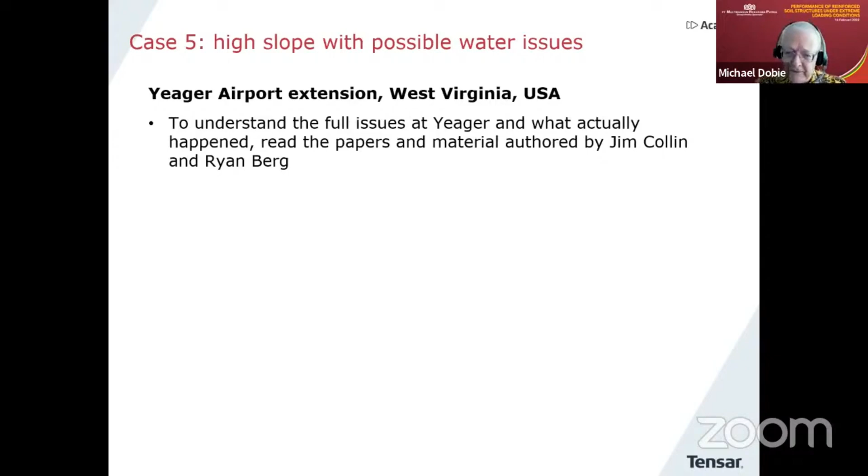So there it is. I think this is bringing me to the end of this presentation today. If you really want to understand all the real issues at Yeager, and there were many, then please read the papers and the material authored by Jim Collin and Ryan Berg.

So I just want to finish off with a few summarizing points here based on looking at these 5 cases of what I call extreme loading. And the way it worked out, of the 5 cases, 2 performed well and 3 either failed or performed badly. And I'm satisfied that in all cases, a routine analysis - what do I mean by routine? I really mean limiting equilibrium analyses - could predict the observed behavior satisfactorily.

So many of you might say, well, why wouldn't you be rushing in to use FEA? And most certainly, yes, by all means, that would be a really good idea. I'm not sure for the ultimate limit state you'd see a lot of difference in the results. But the point is that in most of these structures, to set up a full FEA model would be very time consuming, especially to do it thoroughly and properly, plus the fact that you'd be very short of data, probably. So the actual improvement may not be that dependable, but certainly FEA, yes.

But we tend to use FEA when we have specific situations we want to understand better, when we want to know more about deformation. But for most routine design that I come across, we're using limiting equilibrium. So I am happy that those techniques really work well in all of those cases.

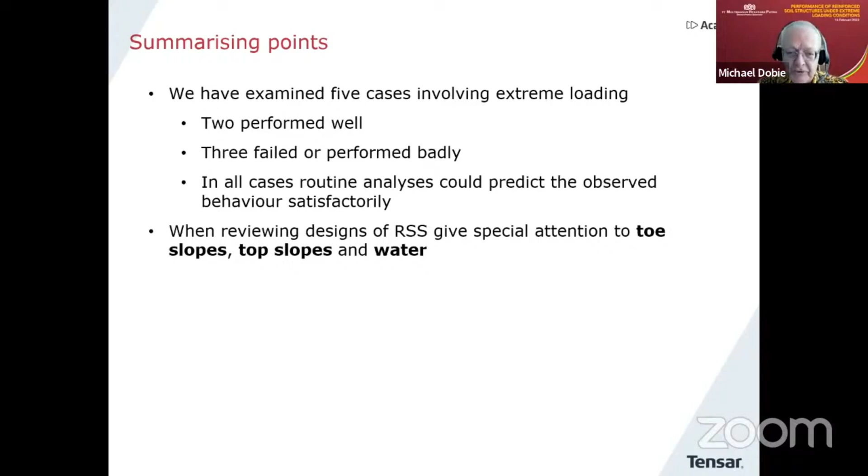Now, a few final comments. This is from experience of looking at many of these structures over the years, but of course, all aspects of a reinforced soil design are important, the soil parameters, et cetera, but in particular, when you're looking at these structures, if you have a toe slope, which we had in two or three of those cases, a toe slope or a top slope, or you have water, which you're normally going to have, these require special attention. In fact, in the last two cases, there was a toe slope, and in both cases they were involved in the behavior that took place. So be particularly careful when you're building very heavy structures on top of existing slopes, because you already have a situation there which may lead to instability.

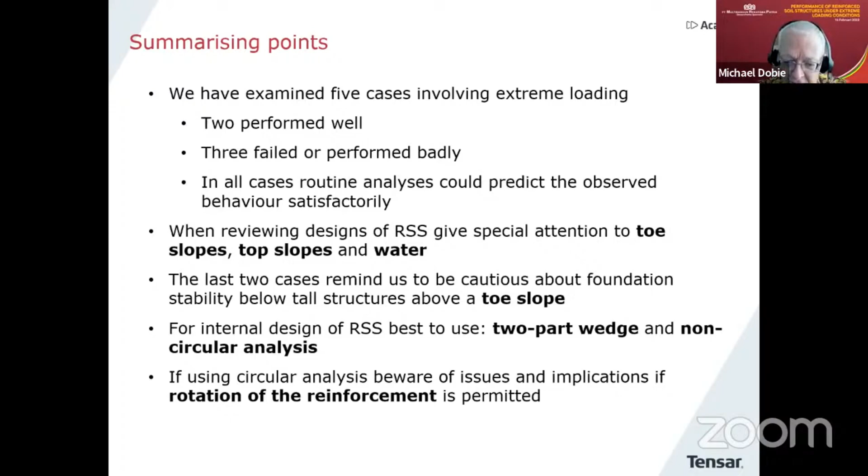For internal design of reinforced soil structures, my recommendation is to be using either a two-part wedge method or a non-circular method of slices analysis. And if you're using circular analysis and you find you're making use of rotation of the reinforcement, as I described just now, please be very careful about it and understand the implications of doing that.

And then finally, a point to make here is that when you're investigating designs for seismic areas, then it's a very good idea to look at combinations of horizontal and vertical acceleration, different combinations, especially when you've got things like toe slopes, because you're never quite sure what's going to be the critical situation. So that would be my recommendation in that situation.